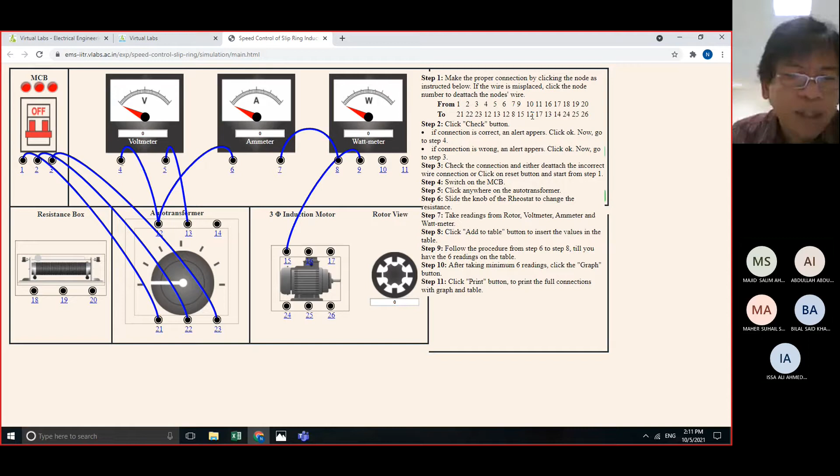So number 10, from number 10 of wattmeter, you will connect it to number 12. Number 12 of motor. Where is number 12? You need to connect it in number 12 of auto transformer. This one, 10 is to 12. This 10, you will connect it to 12 of the auto transformer.

The next, 11, you will connect it to 17. So what is important, slowly but surely, so that you will not commit mistakes. So you will connect 11 to 17. So from wattmeter 11 to number 17. 17 of motor. Okay, 3-phase motor.

The next instruction stated here, 18, from 18, we will connect it to 24. Okay, so from 18, it is the resistor box. We will connect it to 24. Okay. Then 19 of the resistance, we will connect it to 25. So from 19 to induction motor.

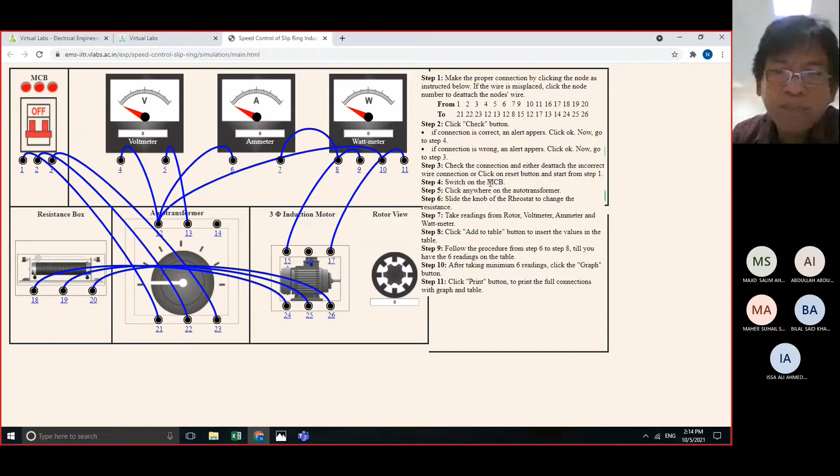So switch on the MCB. Okay, we need to switch on the MCB. We are now in step number 4, brother. Switch on the MCB. What is meant by MCB? The miniature circuit breaker. We need to switch it on. So from here, we need to turn on the MCB.

Okay. As what you've noticed before, it is red color. Now it becomes green color. Okay, it became green color now. Then

Instruction number 5: click anywhere on the auto transformer. We are now in step number 5. Okay, we are now in step number 5. Click anywhere on the auto transformer. Okay, so this is now step number 5. We will click this one, the auto transformer.

So as what you've noticed, it will move until here, up to 3/4, approximately 3/4.

Okay. The next instruction here, okay, number 6, step number 6, slide the knob of the rheostat or the resistor box to change the resistance, and then take the reading from the motor. So meaning to say, we will slide this, small slide. So did you see? The rotor now, it's now moving clockwise.

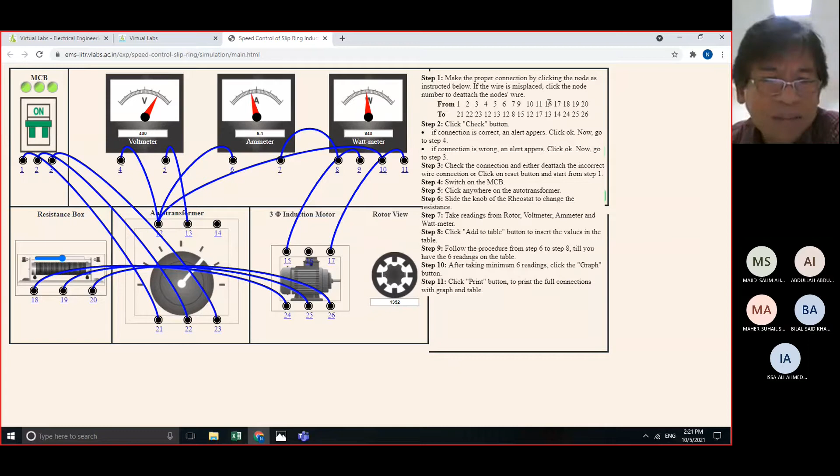But here there is a 16 to 13, meaning to say from 16 going to 13, right? But it's still moving, brother. It's still moving, right? Okay, anyway, let us continue. Anyway, I will repeat it again later so that it becomes complete. So this is what you're going to do starting next meeting, okay? Since this is the first meeting that I introduced to you about the simulation, we will repeat it again later.

Then after this, go to your laptop. There is one function of your laptop there. So you type the snipping tool, okay? Snipping tool, you know that snipping tool? It is very important, brother, because if you will submit the report, in your presentation you need the report.

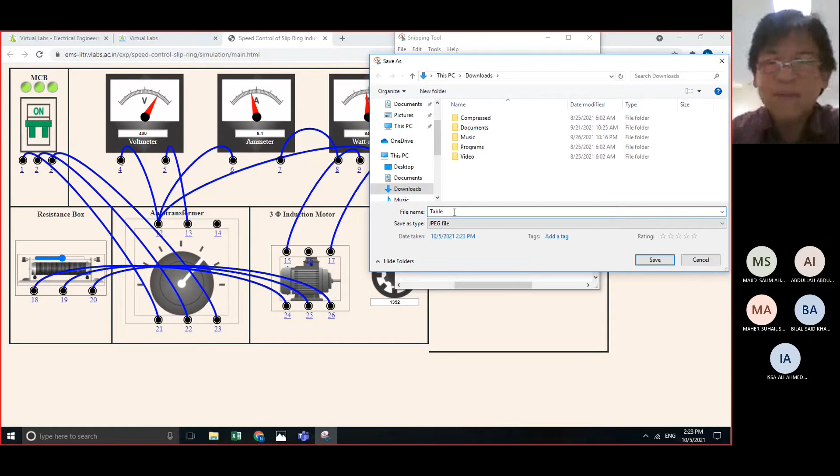So this is now your data. You just cut it like this, and then you will save as. Okay, save as, let's say table number one. This is your table, you put here as table. This is your data or table, and then okay, then save.

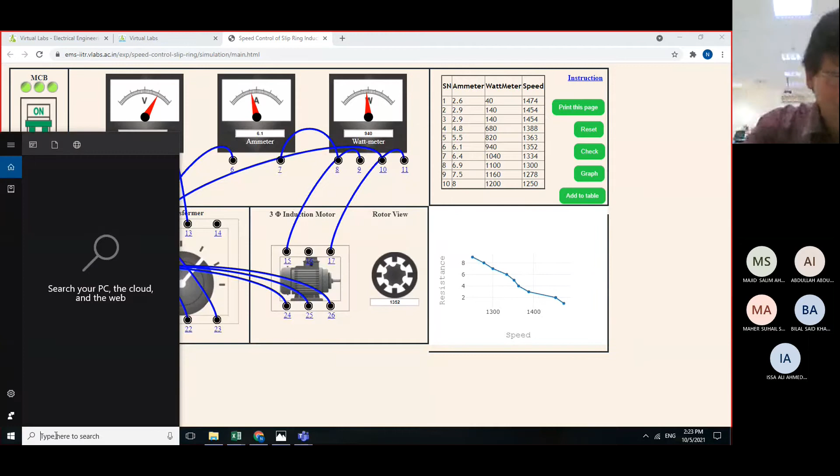Next is the graph. Okay, go to graph, this one, graph. So immediately, when you click the graph, you have already this graph. Okay, so you need the snipping tool again. Go to, type here snipping tools. That's why it is better if you have a laptop or a computer, so that it is very easy to capture the image. From here, you have the snipping tool. Okay, the speed or the graph.

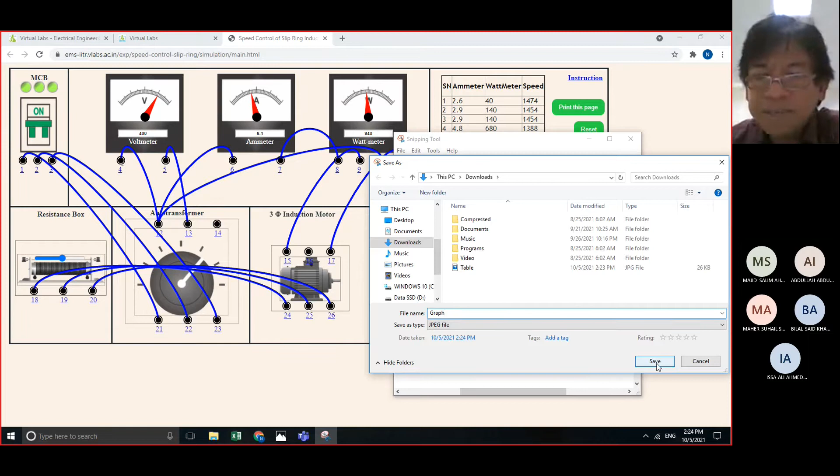So again, you just click save as. Okay, this is now the graph. Type here graph. Okay, then save. So if you've noticed now, class, that we have the data and we have the graph.

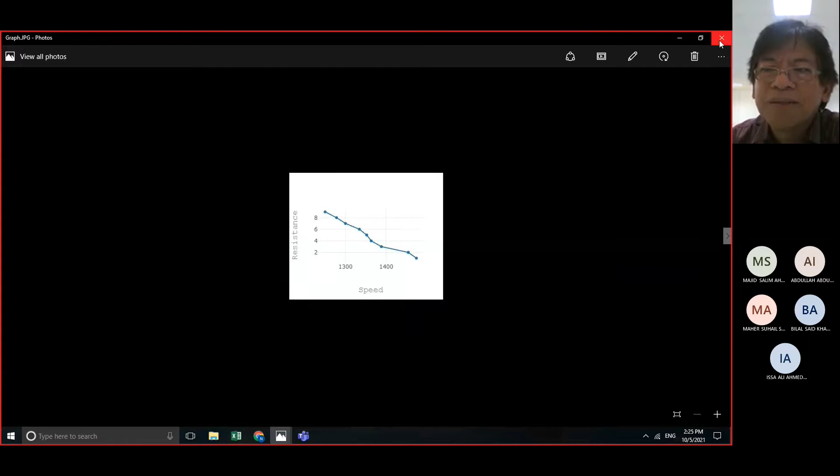So let us see. Okay, from here, if you want the downloaded value, if you need the graph in your presentation, it's now here. Okay, did you see this? You have now the save data, and then you have also the save graph of your simulation presentation. So did you understand? Starting next week, class, one by one, Teacher, you will do like this. What I did, that's experiment number one, yeah?

No, this is actually your project, not an experiment. How many times have I told you, brother? It is in the form of a project. A project is different from an experiment. It so happened that we are online, that's why we will use the simulation, but your course is a project, not an experiment. So let's just focus on this project, okay?

So if you have a mistake here, it will not run. For example, we will make a connection which is a mistake, because I will give you a mark for your presentation one by one starting next meeting. I will give you an example, brother. Okay, here, we will stop this.

Okay, then reset. For example, I will reset it. Okay, the simulation, so from here, for example, we will do the connection. For example, we will do a wrong connection, so this is your connection. We will perform a wrong connection so that you will see what happens if your connection is wrong.

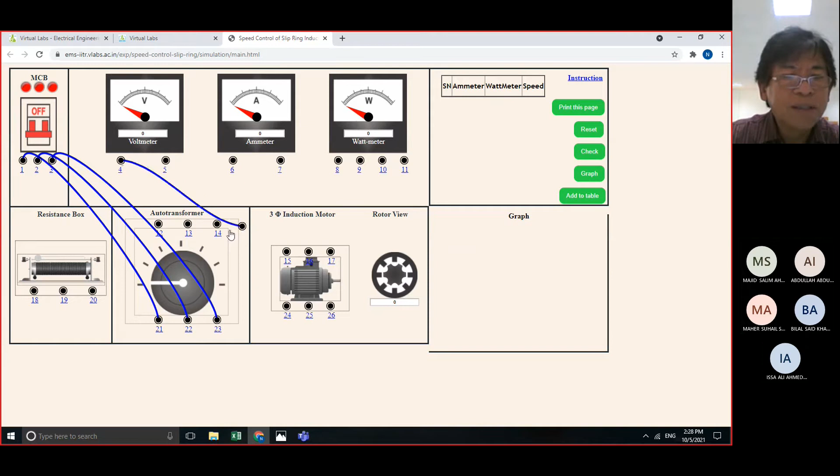So number 1, you will connect it to 21. Number 2, you will connect it to 22. Number 3, you will connect it to 23. Number 4, you will connect it to number 12. Number 5, you will connect it to number 13. Number 6, you will connect it to number 12.

Then 7 to 8, number 7 you will connect it to number 8. Then number 9, you will connect it to number 15. Then number 10, you will connect it to number 12. Then number 11, we will connect to number 17. This is before, there's no connection before, but there's no problem in the operation.

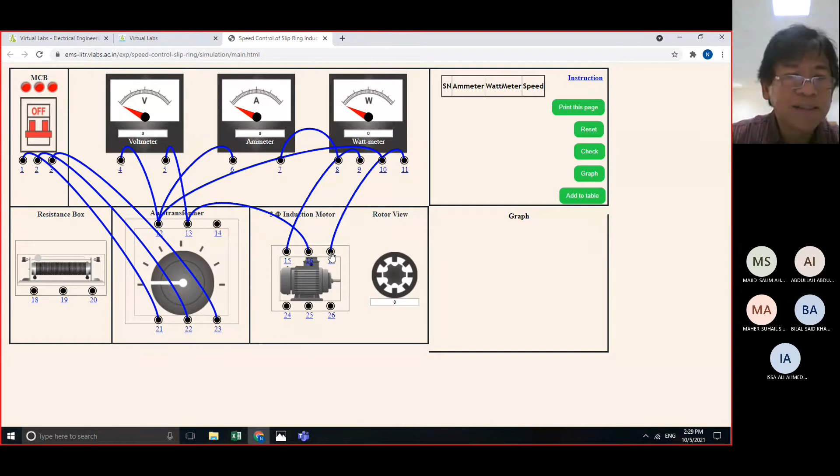So from 16, we will connect it to 13. You know why? Because this is only a common connection, so that's why there's no problem for this. Anyway, let us complete the connection. 17, from 17 we will connect it to 14.

And then 18, from the 18 resistor, we will connect it to 24. Then 19, we will connect 19 going to 25. Then 20, we will connect it to 26. Did you see? All slots, all nodes, there is a corresponding wire connection.

So we will check. The next procedure here is to check. Alert. What is the alert? Correct connection. Proceed, switch to on, take the reading. MCB, switch on, okay, MCB first. Yeah, okay brother, because you need to check first if your connection is correct or not. So this time your connection is correct, so you will click OK and then proceed to MCB.

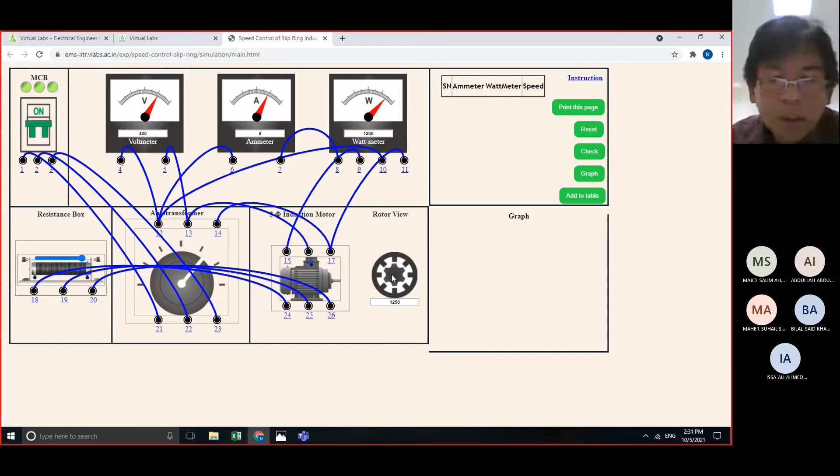As far as the motor is concerned, it will depend on the rotation, on what the resistance movement is. Did you see? If I adjust the resistance to maximum, the rotation, the movement of the motor becomes slow. And if the resistance is low, you will notice the speed of the motor is very high, or very fast, okay.

Okay, then how to make data for this? So as I told you, to make data, adjust, then click the graph. Okay, add the table. You will make a table, table 1, this one, and then another table. Click again here, one click, and then add table. Table number 2. Then add again one here, then okay, table number three.

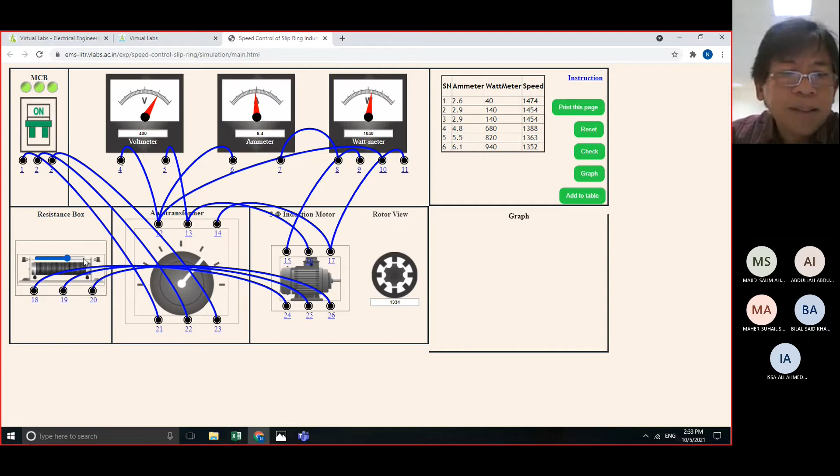Okay, click here and then add table. Another, okay, click here and then add table. Okay, only like this, add to table, and did you see, up to 10. Let us maximize it up to 10. So the reading is like this.

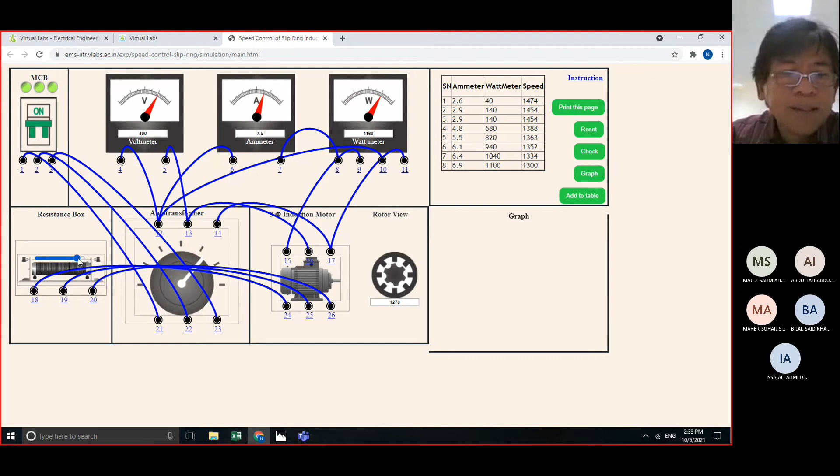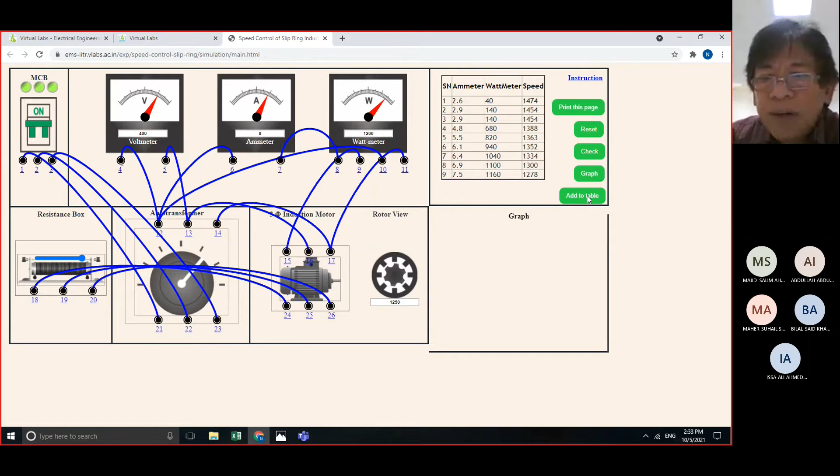Okay, then maximum is 10. Did you see, if I click add, it's already here - only maximum 10 readings are allowed. So meaning to say, we cannot add any more to the table.

Okay, so up to a maximum of 10 only. Then the equivalent graph - did you see? This is now the equivalent graph of our project.

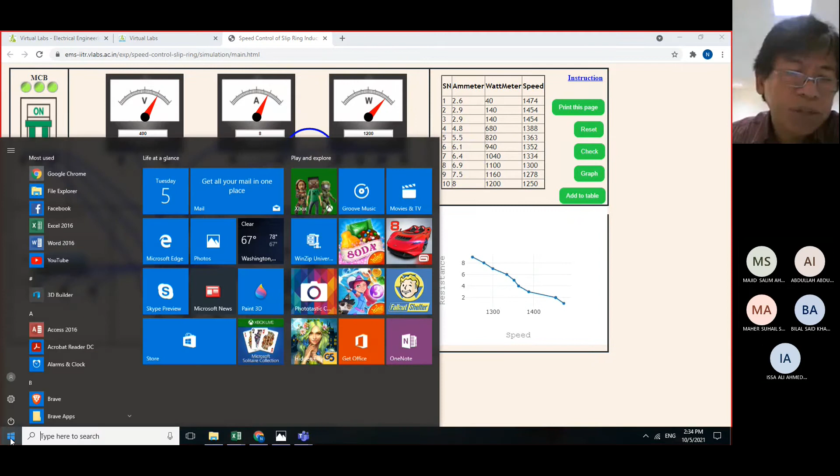So as I've discussed, you already know how to copy the result. To copy the result, it is very easy. You just go to snipping tool here. Click new, and then you will cut this, and then save.

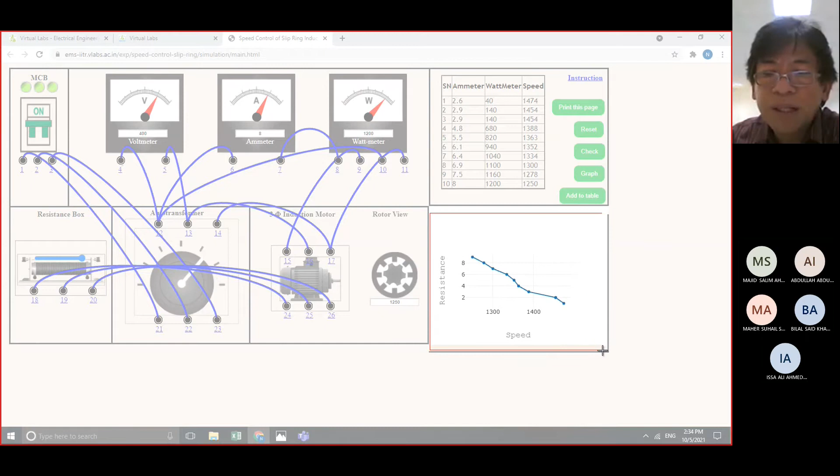And then again, from snipping tool, just type snipping tool. You will see snipping tool, click new, and then you will cut also the resistance with respect to the speed, this graph. Then save also, save as. Is it clear?

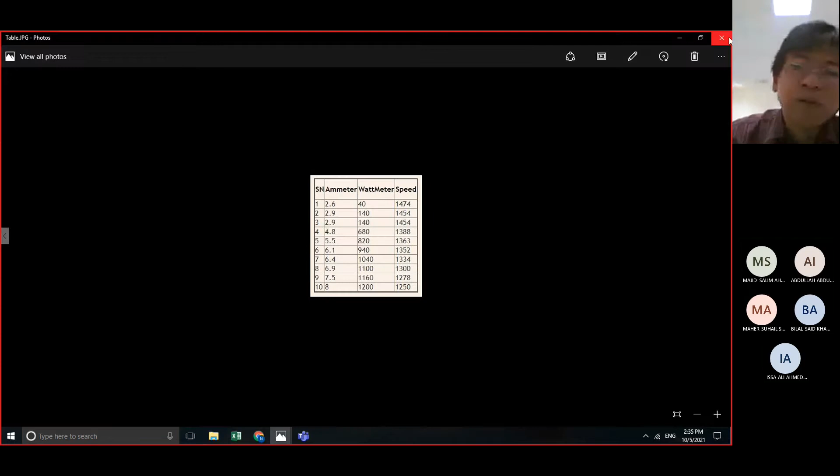So when you need to do your report, you need the schematic diagram, the block diagram, the circuit connections, the wiring connection, and also the table - this is a requirement for your report. So you have now the table, you have now also the equivalent graph.

So what is the remaining part? You need to explain it to the panel or the teachers who are giving you marks during the presentation, in your mid presentation and final presentation.

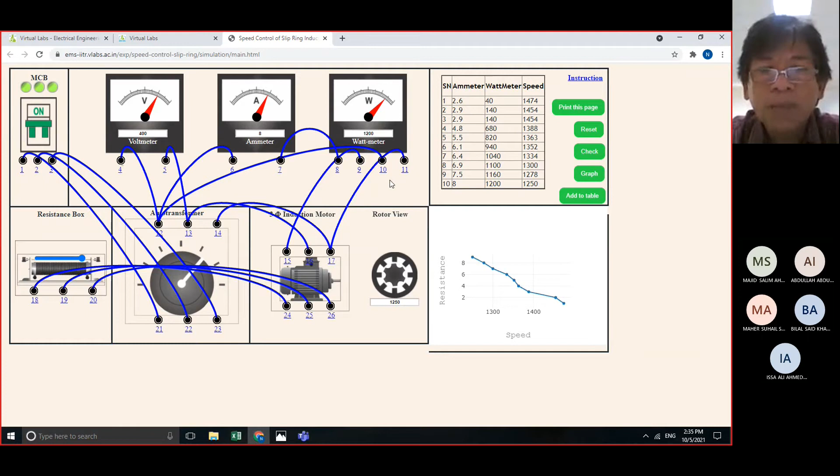So class, practice this task, because this is an individual task. As I told you, this is your individual task, and I hope that you can perform it individually.

Starting next meeting, anyway, any volunteer - I will accept any volunteer who wants to start, because only 5 students are in your group. You are all 5 in your group, so anyone who wants to perform it immediately, it's up to you, brother, as long as you are ready.

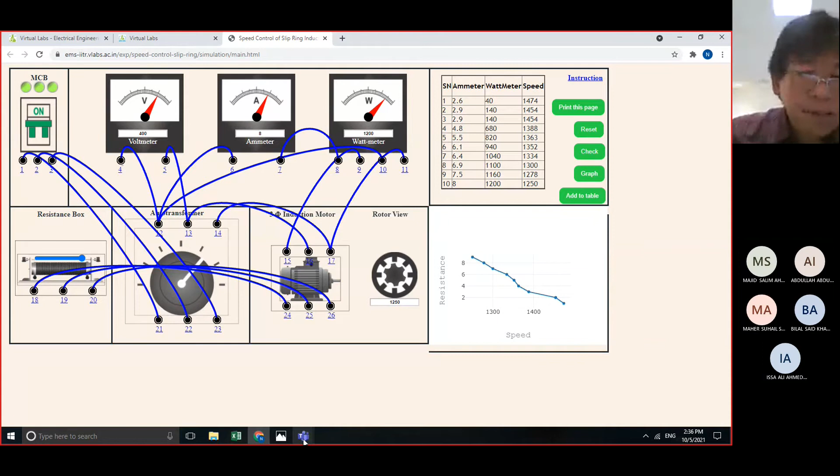And then after you connect it and operate it like this, of course you need to explain also the operation, so that you will start to defend your project. Okay class, so this is what is about your project.

Yes brother. Teacher, I need to understand how to go about this project first - the steps. Okay brother, okay, this step, you need only to go to this link.

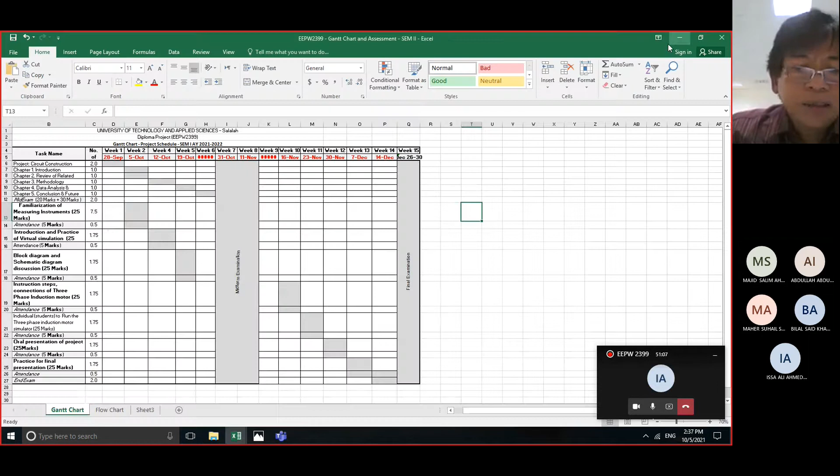I will repeat, for example, you have already this link. So you need to go for the link. Okay, from scratch, you don't know the link for example, so go to your Google, open it and then go for your link. If you have already that link, you put a bookmark for that so that every time you will use it. So this is now your link.